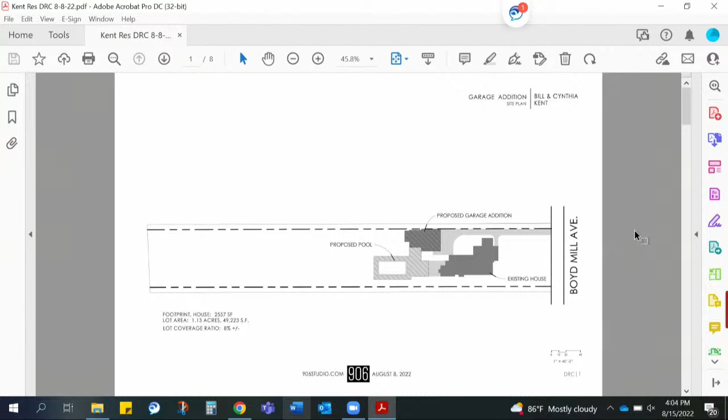Thank you. Okay, Matt, welcome. Thank you, and thank you for letting me go first. And last. And last. I'm used to last, I'm not used to first.

The owners want to build a pool, and that's not part of the scope, but they want a pool house, a garage, and then a guest house area over the garage for when their kids visit and their future grandkids visit.

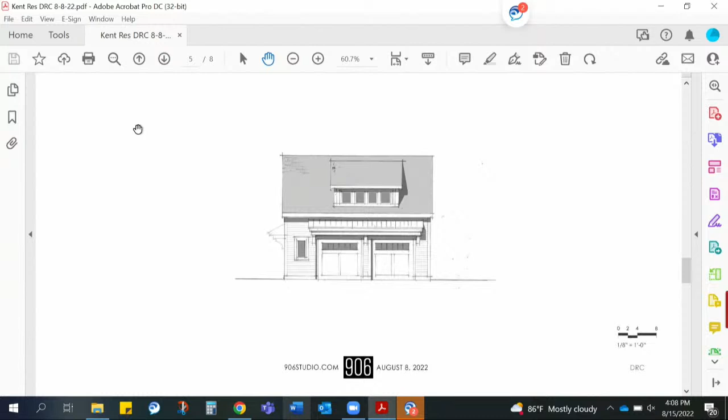If you go to the next page, front elevation. Try to keep it appropriate and scaled appropriately and detailed appropriately relative to the main structure, to the main house. And an approximation of the 3D view of what that would look like.

I went out and verified, took a few spot elevations, and from where the front of the house is to where the garage is, there's more than 4 feet of a drop. It's closer to 5 feet. And so that does help. Also, with the garage being set back at about 160 feet or so from the road, about 85 feet from the front of the house, that also helps.

Next. And again, these are rough models just to show the basic massing and the basic fenestration, but accurate in size.

Just to orient you, the top left image would be from the neighbor's yard, I suppose, near the front of their yard, perhaps, if you could see through their hedges and trees, looking towards the front and the right face.

The top right image would be from the neighbors to the right, from their backyard, looking towards the rear elevation and that right side elevation.

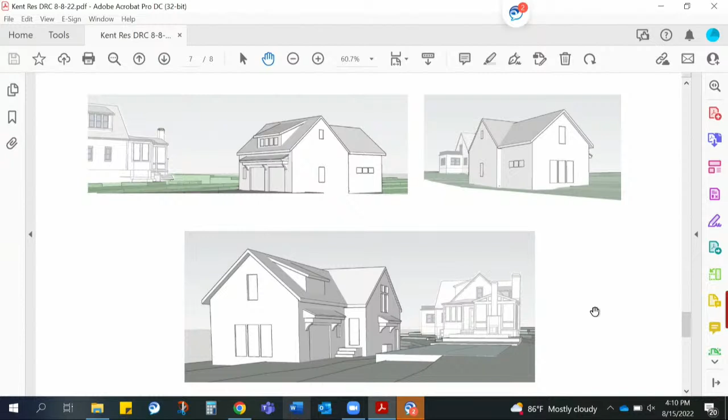The bottom image is from the rear portion of the yard, looking up towards the structure. And you could imagine the pool being to the right, in line with that outdoor fireplace that's on the house. If that makes sense.

And then the next image is just a site section elevation showing the relationship of the garage to the main house and showing the drop in grade. Matt, would you mind explaining a little bit more what the difference in grade is and what the difference in height is if they were compared on an even plane?

Yes, as the main house is approximately 25 feet 6 inches tall, as measured from the ground. If you were to measure a line if you're standing at the house, at the front corner there, and measuring up from that point, that'd be 25 feet 6. At the garage, it's 24 foot 6, measured from the same relative point.

I'm showing a 4-foot drop between that, so adding the 4 feet to the 1 foot means that the ridge would be 5 feet below the ridge of the main house. And that's a conservative number. I think it's closer to 6 feet below.

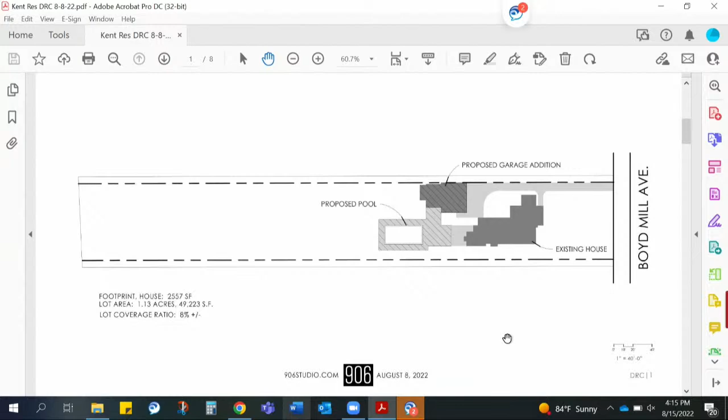Correct. And you could, if you kind of keep that image in mind and then go back to the site plan, you can see and plan the relationship of the garage to the main house. So a good portion of it lies behind the house, so you won't see a full front elevation until you get pretty far down the driveway. I guess the only comment I would have about that dormer is that it does create sort of a massive look on the roof of the accessory, and I'm not sure if the rest of the commission would agree.

And then one last question, the two garage doors are different sizes, correct? That could be the error of the person drawing it. I think actually I kind of overdrew the shadow, so it might appear that way. But they're the same size. They're 9 foot wide, 8 foot tall garage doors, single garage doors with 2 feet in between them.

My question would be, I know that those properties go down, and does any part of this get into an area that's low enough that neighborhood services is going to require more foundation?

Ms. Pierce, I think what you mean is, is there ever going to be a chance that the slab has to be taller than what it's shown? That's correct.

I don't know if we have the requisite information to answer that at this time, but I do think what could be done by the Historic Zoning Commission in sensitive situations like this is that we require a foundation height survey at the time that the foundation's put in to ensure it's a certain distance lower than the house. But if it made it taller, I feel like this is right on the edge. So if we could know that when it came to historic zoning, that would matter to me.

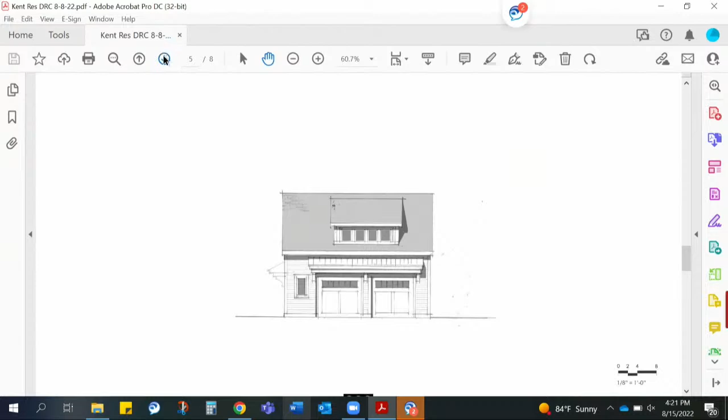And also, if you look at the pictures of the house, that addition has a shed dormer. So when you're standing in the driveway, you would see two shed dormers, so it would provide kind of a design continuity to the rear portion of the house.

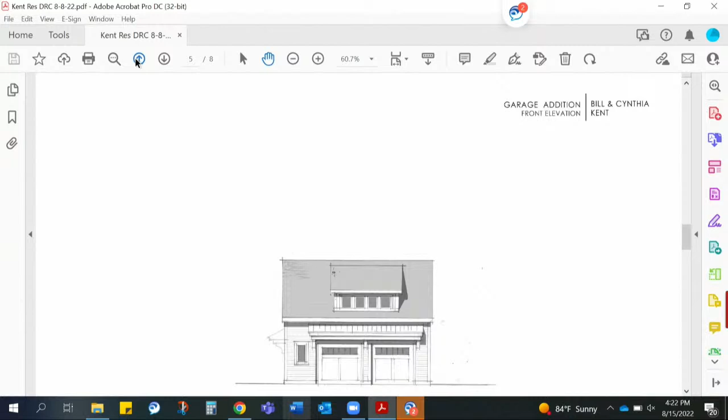Matt, do you mind elaborating on the materials proposed for the project? Sure. The siding will match the siding of the addition, so that'd be white cement fiber, 5-inch exposure, I believe that addition is 5-inch. And then the base could either be a stucco coat over the CMU foundation wall, or it could be a brick veneer. Do y'all have a preference? I do, brick.

I'd like to talk a little bit about fenestration pattern, if I may. There are some locations that BNS mentioned might need to change to allow for egress. I believe this is a smaller window at my suggestion because I wanted to mitigate the size and make it feel more like a 1.5 story instead of a 2-story. Is this one based on the floor plan, Matt, that might need to change? That's a bathroom. So when you're looking at the second floor plan, on the right end is the bathroom, so that will be fine, being smaller.

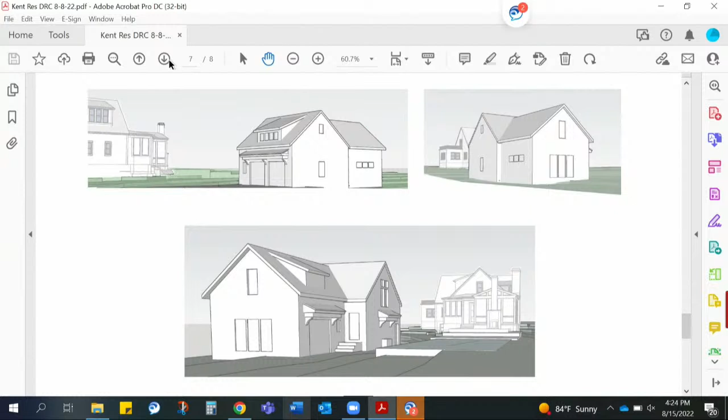Okay, and then this will need to be an adjusted dormer to allow for an egress window. If you go back to the plan, I actually changed the plan so that I wouldn't have to do any window wells or anything like that there. And if you zoom in on that bedroom, this wouldn't affect the exterior any, but on the interior, where the part that's labeled attic, that window there is going to be reconfigured, so that window will actually be part of the bedroom, and so that will function as the egress window.

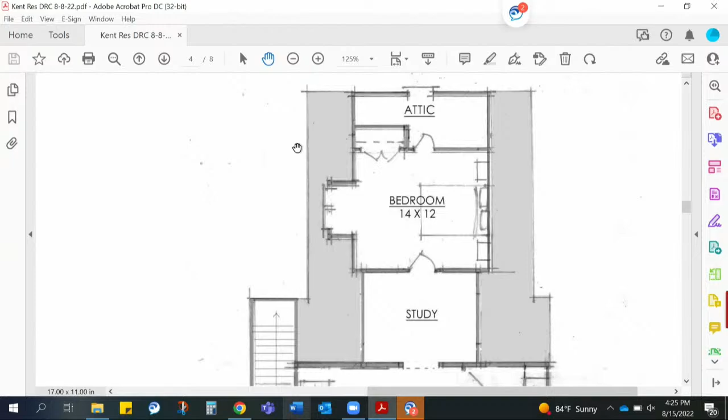Which window are you talking about? The rear-facing window, above the attic. That's going to be part of the bedroom. Correct, and that faces towards the rear of the property.

And that's because those other windows, the sill height is too tall and the windows are too small because of its relationship to the roof. So will the attic just go away? There'll still be a small attic space on each side of that window. So it'll be like a recess in the window.

Just have to be really careful to keep that square footage down, so it's below 60%. So the attic space is not counted in the square footage? Correct, just the heated living space.

So what is the square footage if you include the attic? Do you bump over the 60%? It would go over 60% if I included the attic space. Of course, with a 1.5 structure like this, a lot of the attic space is really low and not really usable.

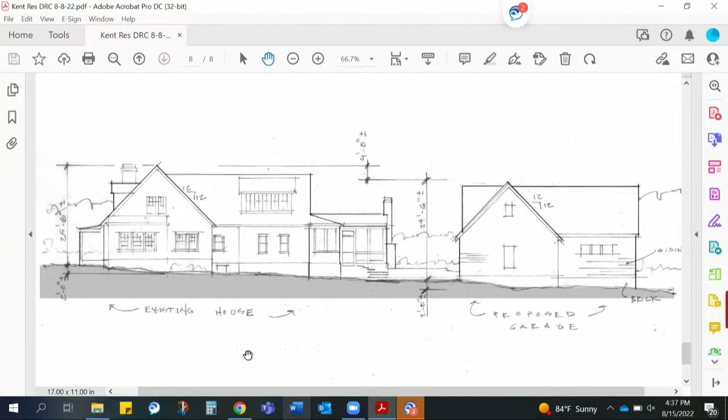One of the questions, not necessarily specific to this project - are the stairs counted in the second floor calculations in terms of square footage when we're going to the 60% number? The guidelines just say the square footage should be limited to no more than 60% of the bottom floor, so it doesn't specify. In Metro, they don't make you count it because you have to count it on the first floor - it's like double dipping, but I wasn't sure how y'all saw that, because we're going to see more of these, and that's a lot of square footage for the stair hole, and it might be something we think about.

That's a great point. Matt, do you happen to know if you counted the location of the stairs on the upper floor as part of it? No, I didn't count it. Whenever I do square footage calculations, when I design it, it's typical not to count the stairs twice - you count it on the first floor, not on the second. Thank you - that's what I see most of in other places, but I just wanted to ask. It has bearing on somebody really getting 500 square feet and us telling them they're getting 600, or vice versa. Just making sure we're clear.

Yeah, that's all my comments. Anything else? Amanda, do you have anything else?

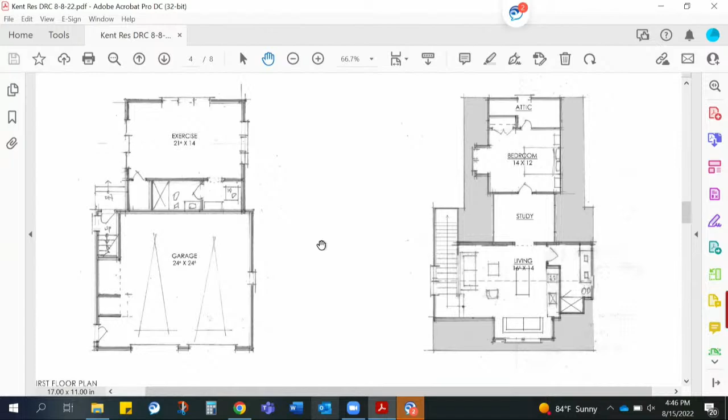I would be over the 60% if that attic space were incorporated into the living space. But in either event, it's not affecting the overall height either way of the gable or the street presence, if you follow me.

My reaction, does that make sense? If you had to count that space in the 60%, you would necessarily have to shrink it elsewhere to get back. So you'd have a smaller massing up above because the rooms would necessarily be smaller.

I just think we have to be careful about rooms that are not finished. I think that's listed as an attic. You're exactly right, Josh. And here's the problem - that's a great point.

If you'll scroll down, Amanda, to where it talks about the square footage on the bottom, those numbers figure out to be 60%. Now, what I'm hearing is, in the second floor, that really doesn't include the attic. It doesn't include the attic. But that's confusing to me, anyway.

And if you're trying to stay with the 60%, that's where I was going back to - your calculations come out to 60%, but that doesn't include the attic.

Right, and that's where I was saying earlier, like if that room was 20 by 20 and just wasn't heated and cooled, and then all of a sudden later it became finished, heated and cooled. Yeah, I understand it, and we'll talk internally.

I mean, Randy is a contractor and a building official. He can see it from points of view that I may not necessarily be able to see. We can collaborate and try to come up with something that will help address that. But please keep in mind, that's one guideline out of a handful of guidelines that address form and scale.

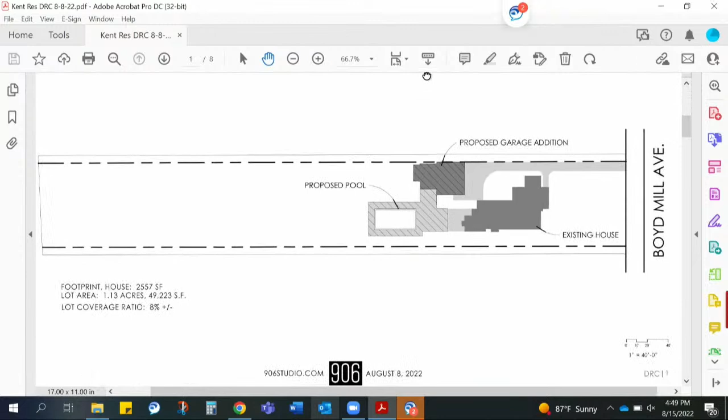Oh, I'm honored. It's good to be the only one in it, Matt. Well, while we're looking at this, would you go back to the site plan? Do you all - the picture that was drawn of what we're gonna see - and then when you look at that, is there any way to slide the garage a bit more behind the house?

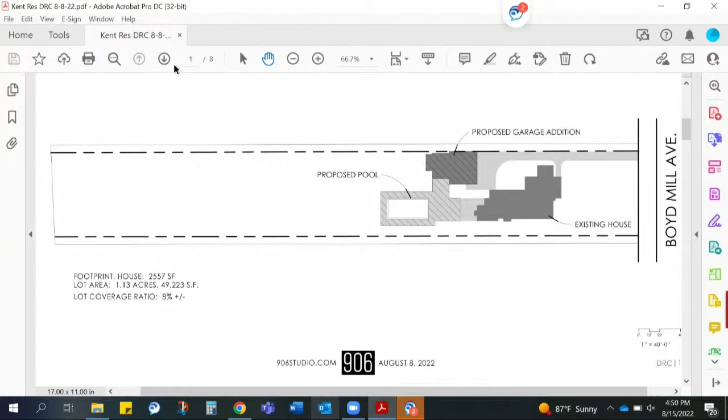Or if you think that - it's just this site plan that's making me think it's more exposed than I thought. You're welcome to state that.

It could possibly - could it come over, let's just not put out a number, 6 feet? I was thinking more it could go over 6 inches, could go over a foot or two, but then it might start crowding that area where the pool is.

Yeah, I think she's saying pushing it back further away - no, I'm saying she's saying could it push inward, inward a couple of feet was what I was thinking.

Got it. Yeah, I can definitely take a look at that and see if I can do that without compromising that space and stuff. I think that will help the perception from the road.